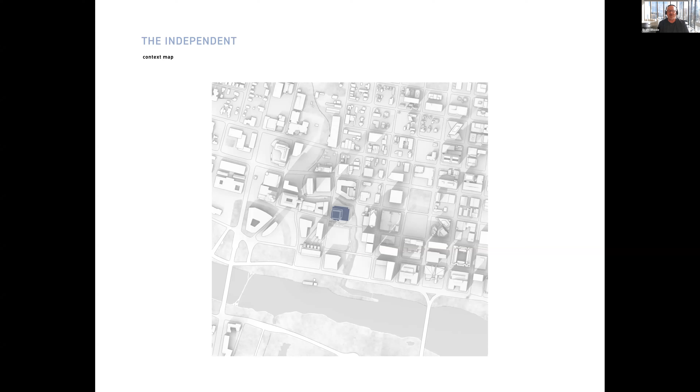So we did a project. It's been built, finished a couple of years ago. It's called the Independent, and it's a 58-story residential tower. Tallest building currently in Austin. There are a couple of other projects coming now that are going to be even taller, but for now it's the tallest, and as you'll see, it had a pretty big impact on the skyline from an architectural point of view.

So this is the building, and it's just a little bit over my left shoulder here out. I can see a little bit of it here still, although my view is getting blocked by other projects that are being built. Some of them are ours, ironically.

So the project was built on a brownfield site that was owned by the power company here in Austin, and there was a lot of things that were left on this site, including underground utilities, that constrained our ability to use the entire site. There was also a downtown creek called Shoal Creek, which borders the two sides of the site, and the creek had some setback requirements from the zoning, so the idea is to prevent tall buildings from being built very close to the creek edge, and bring the scale down for people walking on Shoal Creek. So that left us with a pretty small footprint to use.

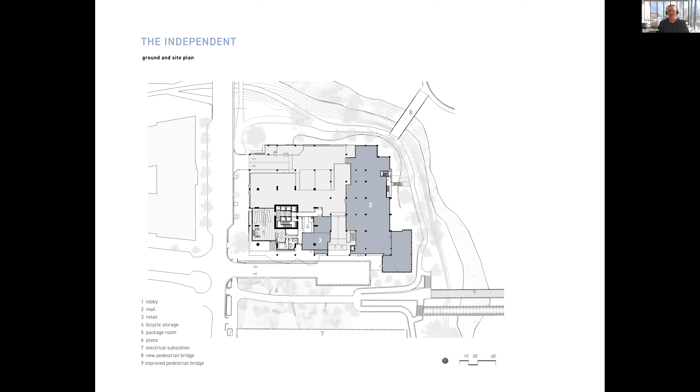Our strategy was to make a very compact core for this tower. It's almost like a sliver building like you've seen in other cities. But this one's a little bit different because it has some things going on that allow us to achieve our building program and also have a very efficient floor plan by having a very strong structural center core. You can see it here, it's black, bold, highlighted. That's all concrete, and it runs continuously from the bottom of the building all the way to the top.

So I'm going to back up here because I think I skipped over an important slide. The building was organized with a program that called for several different types of apartment units. This is a full residential building with a little bit of retail on the ground floor and some parking down below, but it's all apartments.

In terms of accommodating the owner's program for these units, they gave us probably 8 different unit types - the typical 1 bedroom, 2 bedroom, 3 bedrooms, and so forth. But they wanted these apartments to be on different levels and oriented in different ways. Normally that requires a pretty complicated building because you're taking floor plans and moving them around the building and they don't stack, and it can get a little chaotic.

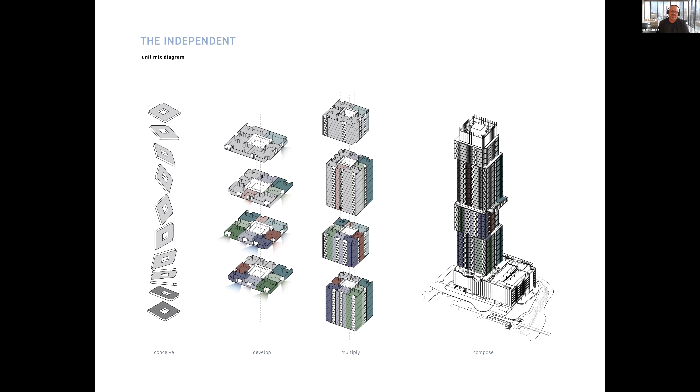One unique thing that came from this is that the floor plates are biased to one side, and when we do this operation, it creates offsets in the building. Here you can see the core is not exactly in the center of the overall building footprint, and when we mirror and rotate, it creates these shifts. It's a way we developed to limit the complications of floor plans being individually oriented in different ways, but rather taking the whole floor plate and orienting the entire thing to achieve different views and different heights for different units.

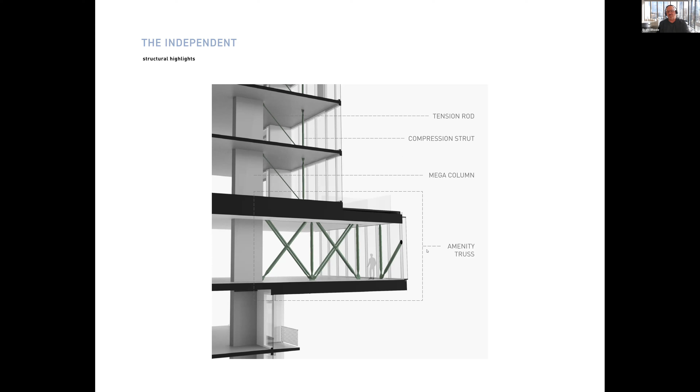Structurally, we handled that with outrigger tension rods to carry the floor plates as they shifted. These appear in the units themselves. We have an intermediate amenity level that projected out quite a bit further using the same technique structurally. This is a shot of level 34 amenity level, which cantilevers 30 feet off the building and utilizes steel struts that run throughout the building.

Here you get a better feel with this section on the left-hand side, showing the stiff core which runs completely uniformly vertically, and then the shifting offsets that occur on either side. When the tier offsets, you'll see struts on that side of the offset - that's the structural scheme to achieve these cantilevers without introducing additional columns.

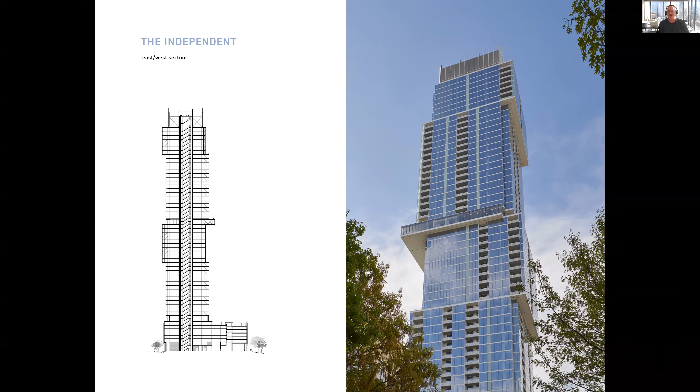Also on level 9, there's an amenity level with a pool, which turned out really well. It cantilevers off the side, sitting right on top of the parking garage.

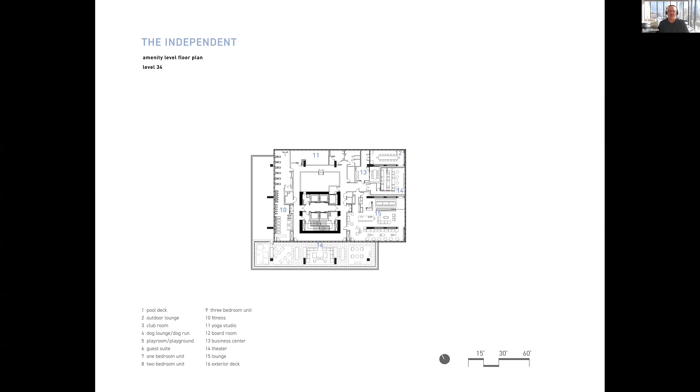The other floor plates are very similar, but they do shift. Level 34 is an amenity level again, and it cantilevers off the building. I'll show you some more shots of that in a minute.

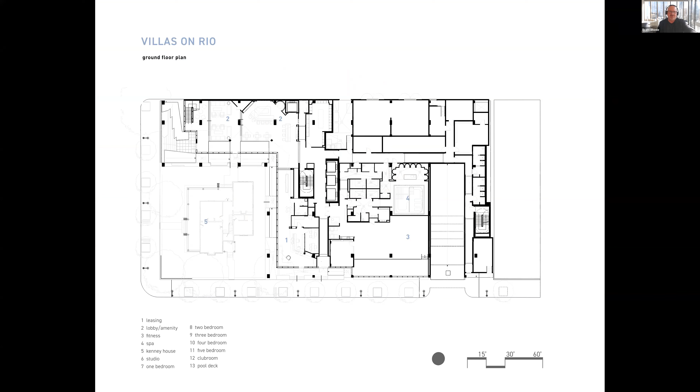The ground floor, on the left-hand side, has the old historic building in the corner on the lower left. It has an underground parking garage, and about 600 apartment units for students, many of them 3 and 4 bedroom. This is just showing how the facade fenestration worked with the angle working in.

We did some parametric modeling with modular panels, fabricated CNC, for the facade here, working with this very odd constraint.

This is going to be the only building in the University of Texas West campus that actually worked with this sky exposure plane, because immediately after this building started, they changed the rules and got rid of the 60-degree sky exposure plane. I'm happy we had the constraint, because it did drive the architecture for the project.

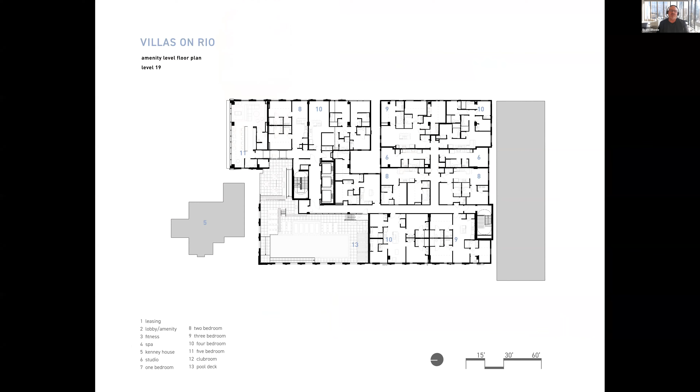Again, the floor plan. This is the top floor where we have a pool with some great views over the Austin skyline.

So moving on to, Paul.

I just wanted to ask you, where did the sky exposure plane come from? How long was it adopted for? What was the logic behind it?

Right, well, when this entire area went through a big upzoning, which is a really good thing, because there were just so many people commuting to UT. UT is a huge school—I think they have 70,000 students—and so many people were being bussed in from other areas around the city, or even different neighboring cities. There was just a lot of commuting, and it was creating a lot of congestion.

So the city decided to face reality, and basically this entire district, which is pretty big—I'm only showing you a small part of it—was upzoned, probably around 2008.

It's been a little over 10 years, and the original zoning rules had a requirement for a 70-degree sky exposure plane, but only on the north side of the block. If your building was oriented to the south, you didn't have to do it—only buildings oriented north.

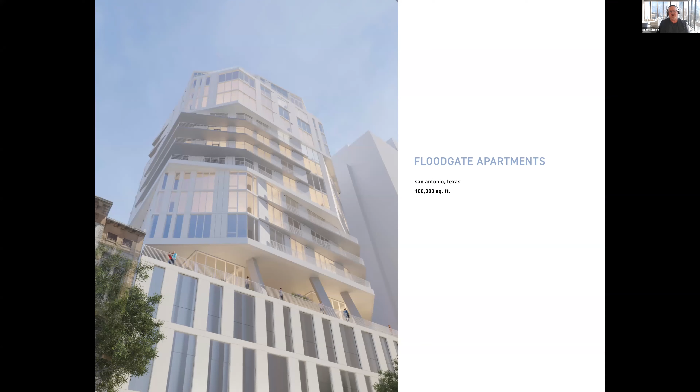So this next project is in San Antonio, again a very unique situation. San Antonio has a beautiful river called the San Antonio River, also referred to as the River Walk, which was done in the 1930s as part of the Works Progress Administration, WPA, project.

The city decided to beautify their downtown, and one of the things they did was dam the San Antonio River, creating a kind of tributary that became known as the Riverwalk.

Quite famous. In this plan you can see the river runs around and comes back through, tying back into the main river. There are floodgates that control the amount of water—if there's flooding, those gates close so the tributary doesn't flood out. Pretty interesting, and all of this was done back in the 1930s.

The history of the San Antonio River goes way back, and there are plenty of beautiful old photographs and paintings from the 1800s showing what the river looked like back then. There's just a tremendous amount of history.

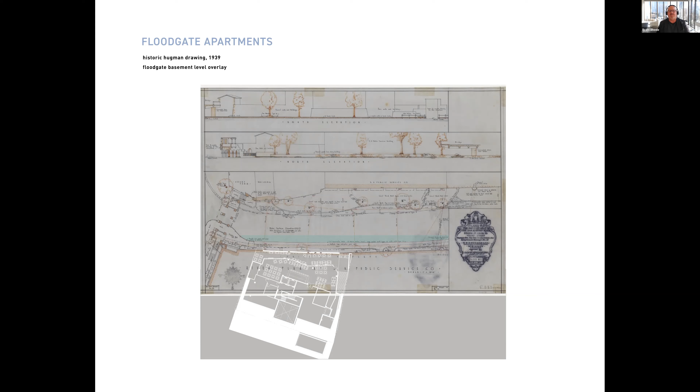A big part of this was the stone walls built at that time along the sides of the river, ostensibly to prevent flooding, so that if the river ever did flood, people could protect the buildings on either side of the Riverwalk.

The upper image shows what's there today—some older buildings that weren't of very good quality, pretty run down, which we got permission to remove, but the wall was sacred. Knowing we wanted to interface with the river from our new building, we agreed to investigate this wall.

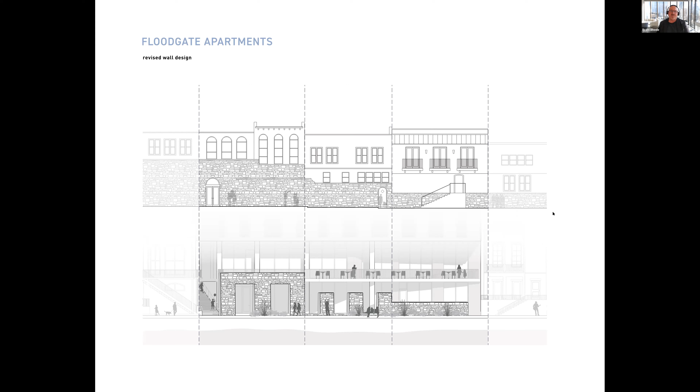We proposed a reinterpretation of the wall, shown in the lower image, which would allow us some views and connectivity between the Riverwalk itself and our new project. It was very well received by the San Antonio Landmarks Review Commission.

This is an image of our building, which is under construction—I didn't mention that, it's not completed yet—with the revised interpretation of the Hugman wall. We're actually reusing the stone that was removed from the existing wall.

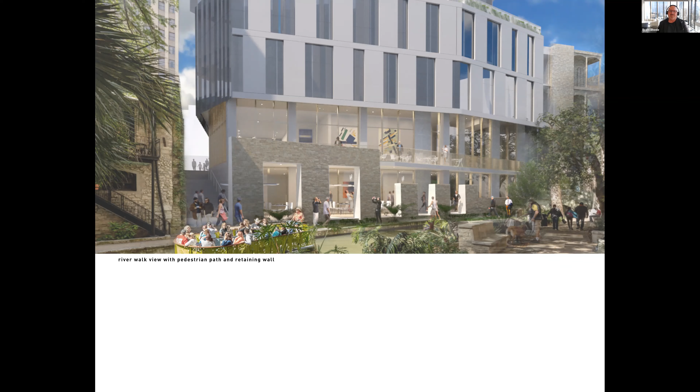The building itself had some challenges. It's a very small site.

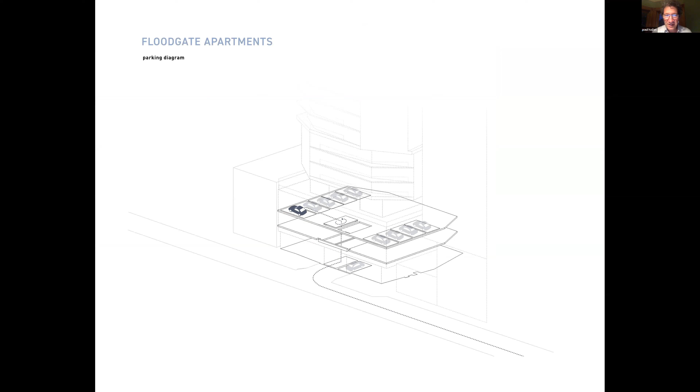Move my location. Right. One question I have - can you talk a little bit? You said it very quickly, but I was sketching here and I was looking at those columns that were placed because of the parking needs, and then they shift. That's quite a structural feat, if I understand my engineering a little bit.

So can you talk a little bit about when that occurred and when you decided that in the process? Yeah, sure. I think the site is so small that we couldn't do a conventional parking garage here, either above or below grade. There just wasn't enough room to ramp up. If you're driving into a parking garage, typically there's a ramp that you would drive up. Well, we couldn't even make that work. It would have been just too steep.

So we moved to the automated system, but in doing so, then it became so important to get the structure extremely efficient and very well placed with columns, so that we could optimize the number of cars we could fit into our automated parking garage.

And so this usually it's more of a negotiation - like when we do projects with below grade parking, there's a column grid, and it's largely based on a parking module, if you will. But there's some latitude there. When we then start looking at the tower floors, we want to optimize this structure for the apartments, to get the right kind of layout and not have columns in people's dining rooms and things like that. So there's a negotiation there, and usually both sides give a little bit.

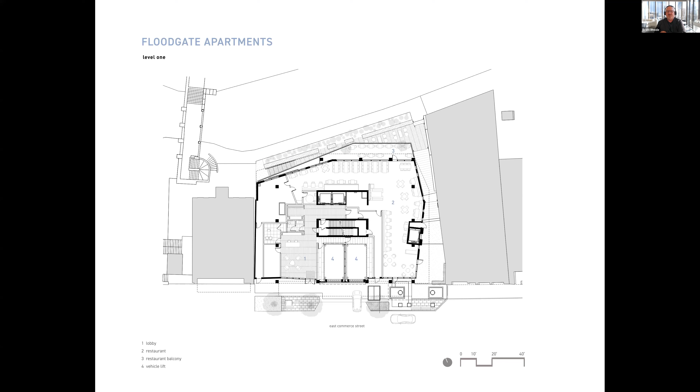So this shows the sort of basic grid of the lower levels, and then I'll go up to a typical floor here. You should look at that, because you can see now how the columns kind of follow the perimeter of the floors.

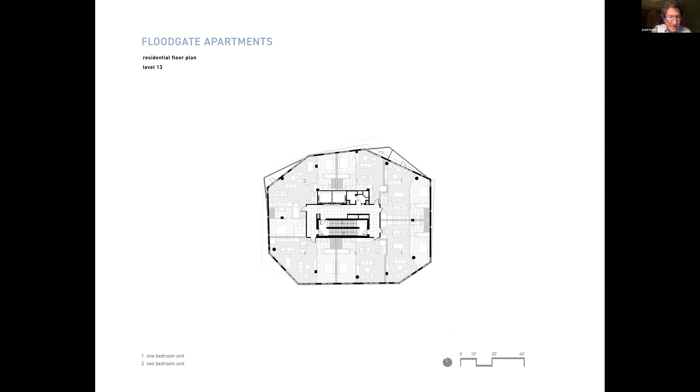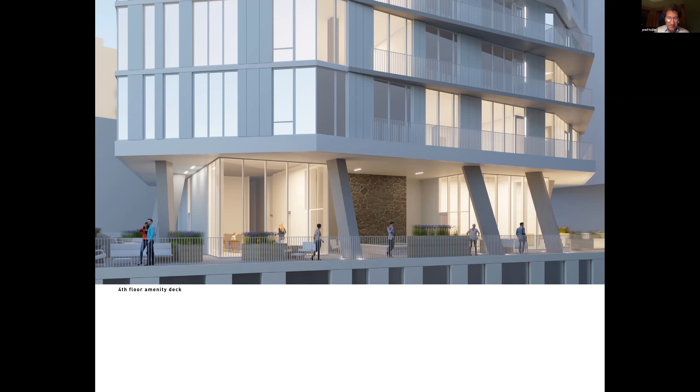I really like that. I like the way that they're exposed. So you call it the amenity floor, where there's some activity and open space, but then it's also a way for you to expose the structural gymnastics of the building. So I think that's a really interesting and architectural, but also structural image. It just shows how you achieved it.

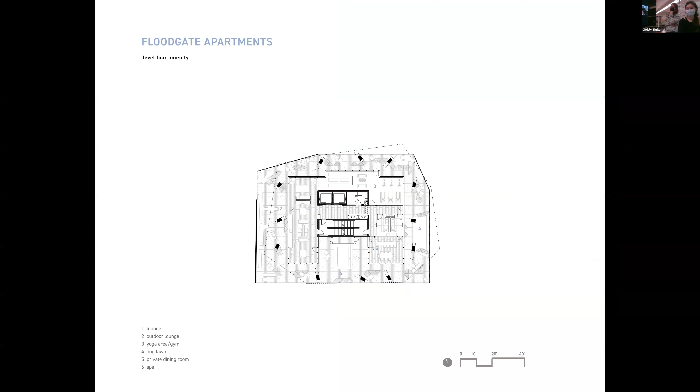Does that give you an idea? Yes, thank you. I was also wondering, going back to the viewshed diagrams you showed for views from each floor, if you could elaborate a bit on how you get that diagram, like how you get the shape.

Yeah, so basically you put yourself at a certain point in this urban environment, in our case where our building site is, and at a certain height, and then you basically cut a plane through everything that you see, everything that's in your field. So different buildings and other elements will intercede and block off parts of your viewshed.

And so the idea is that you could get a sense of what your overall experience is of your views out your window, by understanding what these viewsheds are. Because in the urban landscape, you have tall buildings that will block your view and change your field of vision, and then you'll have openings that allow you to get this vista, this long view out, and maybe even see the horizon. So understanding what that's like for a particular given locale...

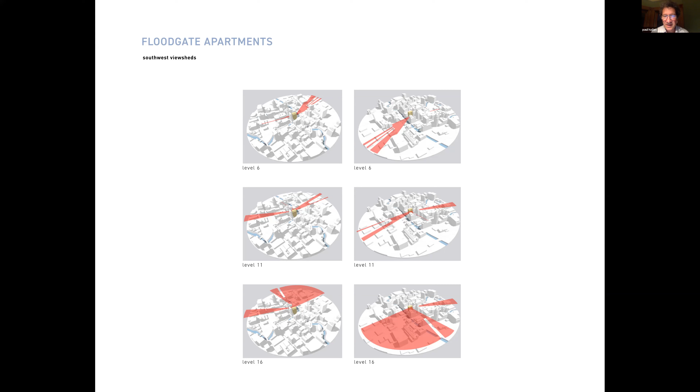And your analysis of the beginning of the project with the Hugman plan and the walls that you used is kind of, it's almost like Back Bay, 3-4 stories low, very residential. So I wondered when those discussions happen with the developer and who you're working for. There's a scale to this, but behind those openings are cars, right? So not shops? Yes, that's right.

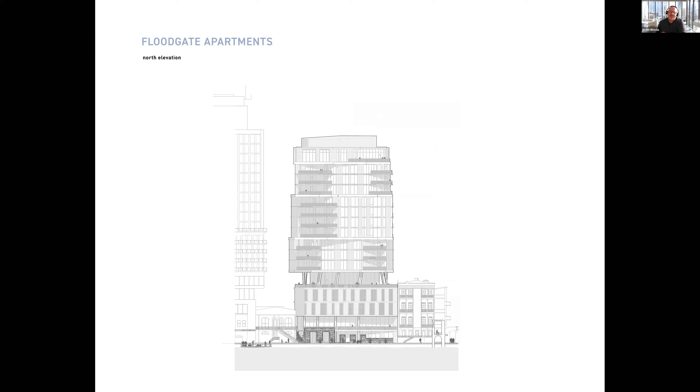Let me go to one of the street views. Above-grade parking is very common in this area, and one of the reasons is because we have rocky soil quite a bit in Central Texas, and it's expensive to go below grade. The other issue is that we're still a car-oriented environment here, changing a good bit in Austin, but certainly not in San Antonio yet.

I did have several conversations with our owner client about not having any parking, about maybe doing an arrangement with somebody else that already had some parking, an old parking garage maybe. But they didn't feel they could rent the apartments without having some parking on site. So we went to pretty extraordinary lengths to make this work with the automated parking system and so forth.

But if you're asking about scale and why we didn't consider alternatives like putting it below grade, we could have done that. We could have gone even further down below the river level and put this parking at minus 2, minus 3. We certainly could have done that, but it would have been very costly. So it kind of comes down to economics.

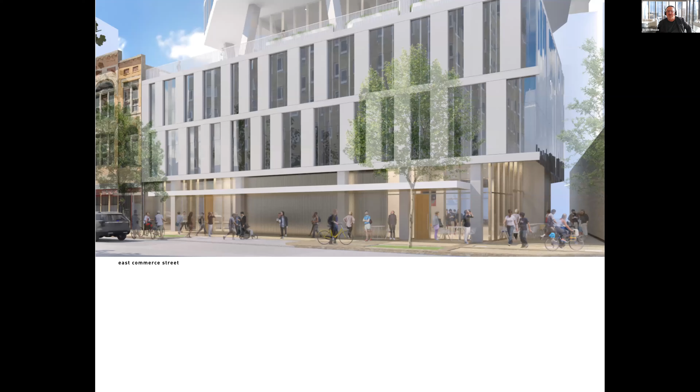I think that last image kind of shows that a little bit. There are older hotel buildings that have been built over the years that are taller. And interestingly enough, this site had been thought to be a site that shouldn't have any height on it at all. I'm not sure exactly why, but the zoning here was for a lower building, and we actually went through a process where we got more height, and we kind of maxed out at 15 stories with the zoning revisions. They just wouldn't support greater height here on this particular site.

Some of these zoning rules and planning principles are maybe a little bit antiquated. Maybe there were reasons 30 years ago, 20 years ago for certain rules, and it's hard for some cities like San Antonio to keep abreast of changes happening all over, cultural changes and technological changes. It's very, very difficult. Their code, they will acknowledge, is antiquated, but they don't have a mechanism easily to change parts of the code. So we were held down to 15 stories on this project.

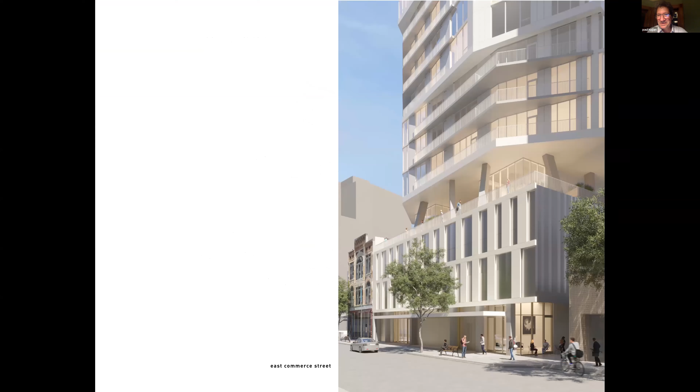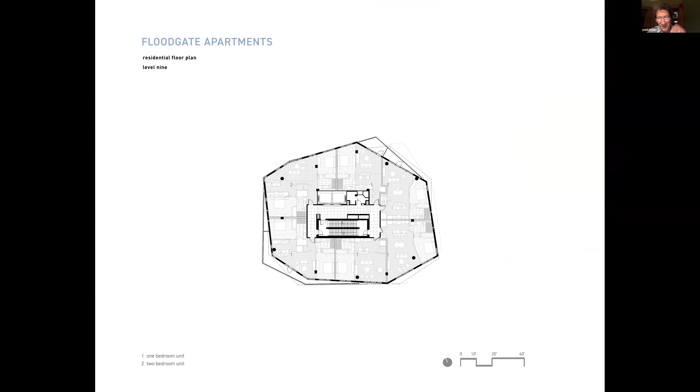The one thing I wrote down as an early question for me, and I think if I can try people's patience, it may be a hard one, but I'm going to ask it anyway, Brett. There was a photograph of the Independent that you had, and I really liked the mailbox, the free floating mailbox scheme. What occurred to me when I looked at the mailboxes is it's like the facade of a small building, right? If you look at the actual photograph in the Independent, making them freestanding and not a corner you have to go to in the building, I think that's brilliant. But then I looked at, I don't know where I saw it, it was one of those lobby shots I think. It looked like the elevations of the building, right? Interesting.

Hadn't thought about that, but for me, and this is that shot you're talking about, I thought more about Donald Judd than anything, just this idea of pristine boxes. Obviously this is nowhere near achieving that level of elegance and simplicity, but just the idea that something so basic could actually become something interesting in a bigger space.

Right, I think it animates the lobby. I really like this, and the reason I wanted you to look at it is I was thinking about the scale of the development and things you're used to dealing with in terms of how the dollars work, whether a development happens and whether it's a good investment, and the things all cities struggle with, which is providing adequate housing that has to be subsidized in some way by developments like this or other sources of funding. We get this question from students, but we also think about it ourselves. Everyone's entitled to basic housing rights, and these places are quite beautiful. So I wonder, knowing the cities a little better than we do where you work, Brett, how does Austin or San Antonio address some of the disparities?